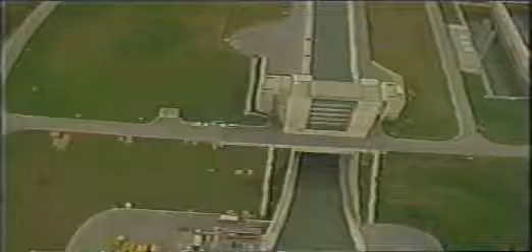Infrastructure is the domain of the civil engineer. It is civil engineers who design, build, and maintain the public works which constitute the physical framework of the civilization we enjoy and often take for granted. In the course of the 20th century, we have seen achievements in this field that our ancestors never could have imagined.

As the momentum of our technical success carries us forward into the 21st century, it is time to review where we have come from, what we have learned, and where we are going.

The Alps loom like snow-capped giants, barring the way to travelers between the Italian peninsula and the world to the north. These mountains and the roof of Europe are typical of the challenges which civil engineering was created to overcome. The world's first modern mountain tunnel came into being at Mont Cenis, born in the railway building frenzy that sprang from the Industrial Revolution. Dynamite and rock drills used in the Alps in the 19th century launched a new era in the art of tunnel making.

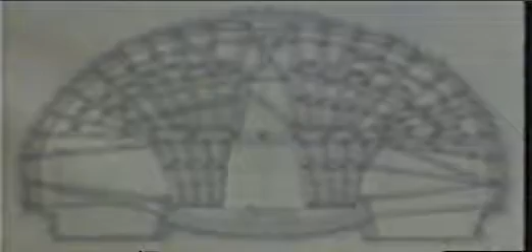Today, the St. Gotthard, the world's longest highway tunnel, runs 16 kilometers through the Swiss Alps. The evolution of tunnel technology from the 19th century to the present has not been easy. In mid-20th century Japan, the Tanna Tunnel and others were built by what was at the time the most up-to-date technology. But the operation was still labor-intensive, plagued by floods and the ever-present danger of collapse. Elaborate scaffolds were devised to keep the ground in place, but structures of wood and steel can only provide support at certain points, and the trouble may begin at any point.

Rock is typically fragmented, and the cracks are often filled with sand and clay. Under the influence of gravity and seepage, these work loose. A piece of rock falls out, and then another. Disintegration is underway. In 1940, an Austrian tunnel engineer, Ladislaus Rabcewicz, became known for a new idea. The principle of the New Austrian Tunneling Method, or NATM, was to transform the fractured surface of the tunnel into a continuous self-supporting arch.

Wet concrete is sprayed over every inch of the walls and ceiling of the tunnel. The concrete lining prevents the escape of the bits and pieces, which, if they're kept together, give the arch its natural strength. The concrete fingers of the lining reach into cavities, uniting rock and concrete in a single purpose. Successful technologies spread rapidly in a shrinking world, and widespread use improves them.

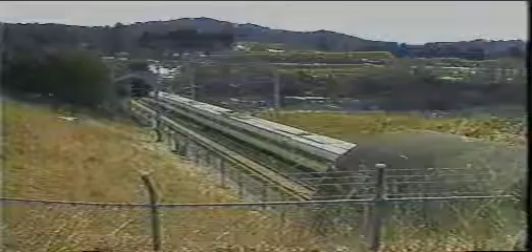Japan is largely mountainous. Tunnels are links in its communications infrastructure. The Austrian method was effective for long, large tunnels needed for bullet trains and highways. Timing was crucial to the method's success. After the initial excavation, the concrete lining had to be applied to the raw surface as quickly as possible, leaving no time for rock to start deteriorating. The stability of the lining is enhanced by using iron rods called rock bolts. The rock is drilled to receive them.

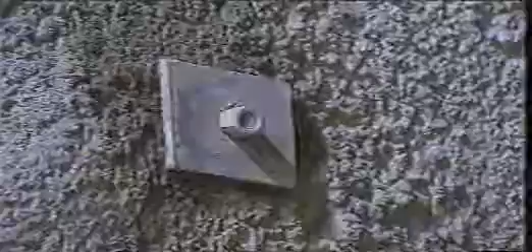Bolts are cemented deep within the rock and serve as anchors. The rods and plates keep the concrete sheath secure and the tunnel intact. NATM was a technical revolution. Kanmon Strait divides the island of Kyushu from Honshu, Japan's main island. Linking these islands was the job of the world's first undersea tunnel, completed in 1944. Lessons learned here let Japan undertake the daunting task of a tunnel linking Honshu with the northern island Hokkaido. The trigger was the loss of a ferry boat with over 1,000 lives in 1954.

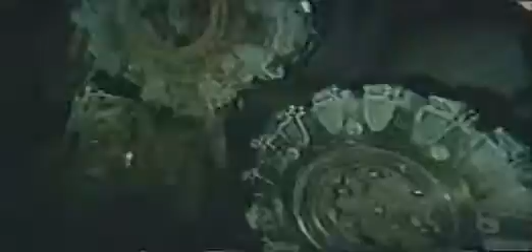Construction of the Seikan Tunnel began in 1971. Surmounting many difficulties, including earth faults, the Seikan Tunnel was finished in 1988. Honshu and Hokkaido were joined by the longest tunnel in the world. Technology developed for the Kanmon and Seikan tunnels played a major role in building another tunnel, half a world away, the Eurotunnel under the English Channel.

This is the breakthrough, the final moment. Until this moment, Britain, the island, was odd man out in Europe. Now, symbolically at least, that special status has come to an end, thanks in part to this remarkable machine. The Eurotunnel now links Britain to the continent of Europe. Over 15 million people currently take ferries or hovercraft each year.

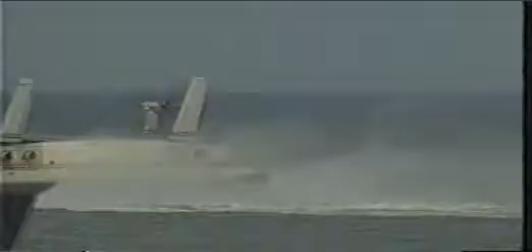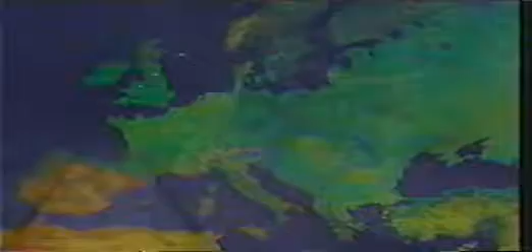The Chunnel, as it's called, was born of the conjunction of political imagination and modern engineering. It's certain to become a major link in the infrastructure of a new united Europe. June 1993 saw the first test run of a train from France to England. Eventually, London and Paris will be just 3 hours apart. The tunnel runs below the ocean floor of the English Channel for 38 kilometers, though its overall length is nearer 50.

It's strictly for railways, and when it's in full service, will run 10 trains every hour. The car trains will carry trucks of up to 40 tons. The construction of the Eurotunnel took a mere 3 years. This was in part due to favorable ground conditions and in part to technology.

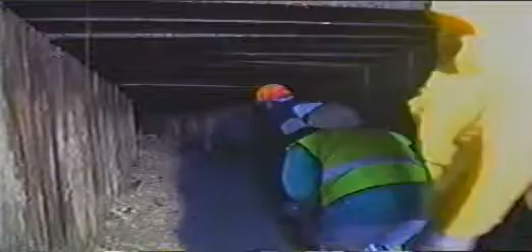The dream of a tunnel under the English Channel has been around for at least a couple of hundred years. In 1876, Queen Victoria and Napoleon III agreed to make it happen. Drilling was done on both sides of the channel. One can still see the remains of this short-lived enterprise near Folkestone.

Techniques used then for drilling through chalk were primitive precursors of those we use today. The machines themselves were steam-powered prototypes of the ones used in the 1990s to excavate the channel. Politics halted this project after a brief 2 kilometers, and the dream lay dormant for another 100 years.

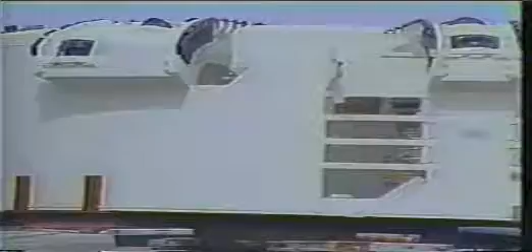In the modern world of the 1980s, 9-meter diameter Japanese machines played a part in unifying Europe. 11 of these tunneling machines were used to dig the Eurotunnel. France and Britain mobilized their engineering power. Vertical pits were dug on both sides of the channel. From the bottom of the pits, tunnel machines began to dig horizontally.

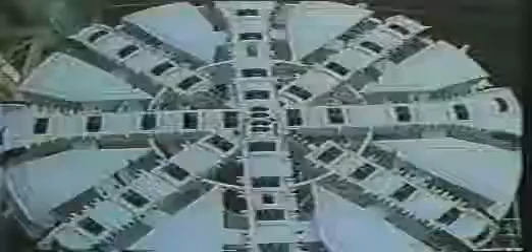The rotating cutter is at the front end of a cylinder of steel which encases and protects the whole machine. Behind the cutter, an apparatus assembles the concrete tunnel lining while excavation proceeds. When a ring of concrete is complete, a series of hydraulic jacks push against its rim, and the whole machine advances.

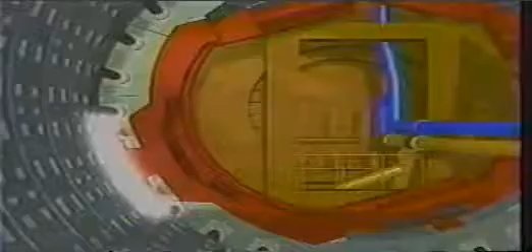It's called a shield machine. It builds as it drills and trails the finished lining and its own support surfaces behind it. This is the shield construction method at its best.

The main problem encountered by engineers building undersea tunnels is water seepage. In the case of the channel, the geology was benign. A stratum of blue chalk running 40 meters below the channel floor resists water penetration. But the layer is only 20 to 30 meters thick, so careful subterranean navigation was essential. The shield machine is not suited for drilling in complex or unstable strata, but it is ideal for blue chalk.

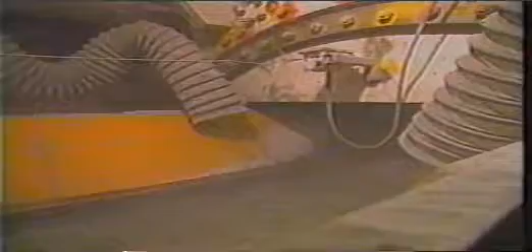Sometimes the machine dug 50 meters a day, 3 times faster than expected. On an average day, 20,000 tons of material were pulverized and carried to the surface, enough to fill 2,000 dump trucks. The construction of the lining, of course, had to keep up with the pace of the excavation. The 8-ton concrete segments of the cylindrical wall were automatically applied to the wall of the tunnel.

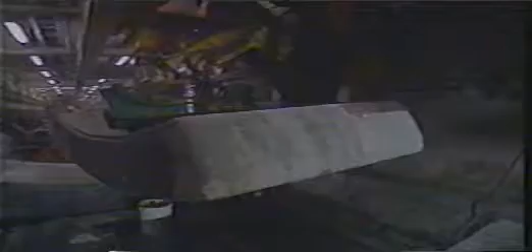The tunnel is almost 8 meters across. Together, the blue chalk layer and the latest shield construction technology let the tunnel under the English Channel be built in record time, 50 kilometers in 42 months.

The shield method idea was devised in Britain in 1818 at the peak of the Industrial Revolution. The first tunnel built with this method goes under the River Thames. The inventor was a creative engineer called Marc Brunel. That first tunnel is still part of the infrastructure of the London Underground. Wapping Station still uses the vertical shaft from the bottom of which Brunel's machine bored below the river.

At the time, many people thought that the ground below the river was too unstable to permit construction of a tunnel, but Brunel, with his invention, proved them wrong. His tunnel has survived for more than 150 years. Marc Brunel owned a lumber mill. It was there that he found the clue which led him to invent the shield machine.

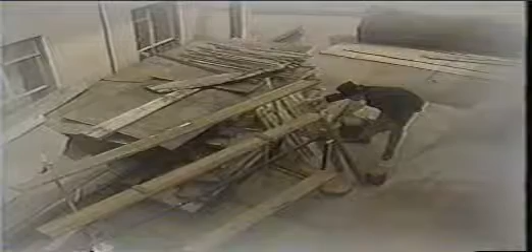Brunel was intrigued by the little holes which are often seen in old lumber. The holes are made by shipworms. They're mollusks related to clams. At that time, London docks were full of ships from all over the world, and their hulls were full of worms. These creatures, just millimeters thick, may grow to be tens of centimeters long.

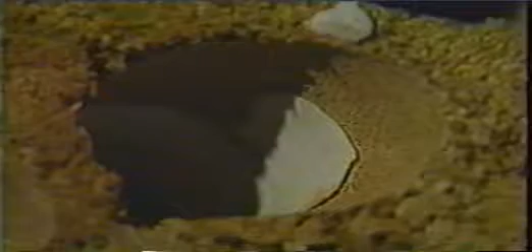They bore into wood using their tiny shells to do the drilling. As they progress, they secrete a substance which coats and toughens tunnel walls against compression and collapse. The white substance here is a shipworm's tunnel lining. The notion of boring and building simultaneously inspired Brunel.

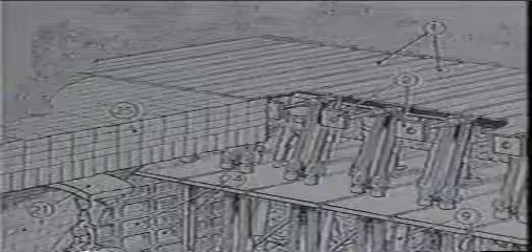The walls of the tunnel he conceived were not concrete, but brick, and construction was primitive by modern standards, but this is how it began. Marc Brunel was born in France, but came to live and work in England. His homelands have now been linked by his invention, inspired by a clam, the shield construction method.

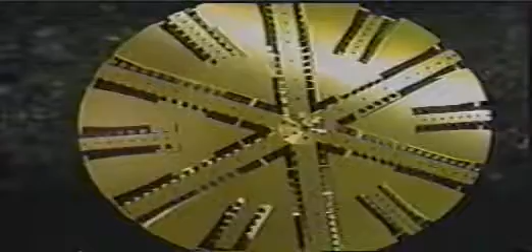The largest and most advanced shield machines are now being manufactured in Japan. This one is 14 meters in diameter and will weigh 3,000 tons. Meanwhile, a tiny sensor controls its automated functions, its nervous system. These sensors will be its eyes and fingers for watching and feeling.

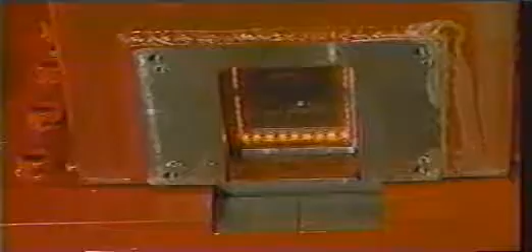The activities of the giant automatic wall constructor are directed in accordance with information delivered by laser sensors. They guide the assembly to a tolerance of less than 1 millimeter. Sensors will be stationed at over 100 points on the machine.

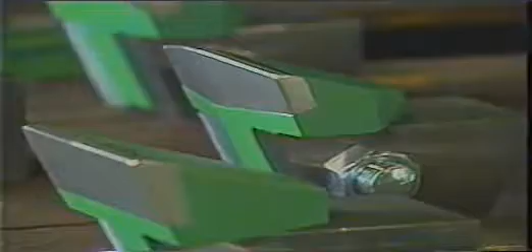The cutting blades, teeth, determine the speed of excavation. Most of the soil in Japan is a complex variety of strata, and cutters have to cope with that variety. Blades are made of exceptionally durable materials like tungsten carbide and cobalt steel. Shield machines are now being used extensively in Japanese cities for subways and sewage systems.

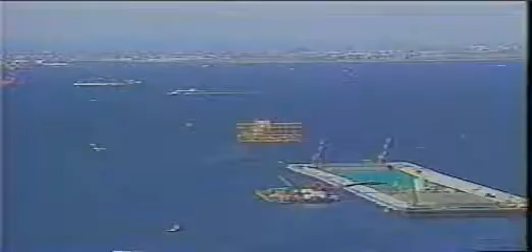Tokyo Bay is today a showcase for the most up-to-date developments in infrastructure technology. A 15-kilometer overpass is being built between Kawasaki and Kisarazu. A 5-kilometer bridge will link the Kisarazu side to Kisarazu Artificial Island. From there, the road will pass for 10 kilometers through a tunnel under the ocean to Kawasaki. Halfway along the tunnel is a second artificial island.

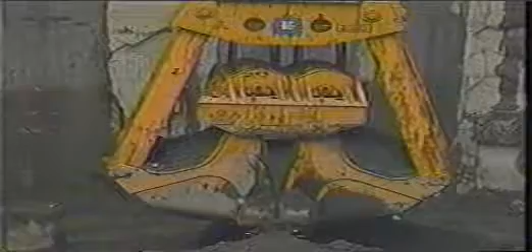At that point, a vertical hole 100 meters in diameter will ventilate the tunnel, exhausting the fumes of the 64,000 vehicles which will pass through daily. This huge hole will serve initially as a base for shield machines used to build the tunnel. The giant excavators are already dwarfed by the structure they are helping to create.

From the bottom of the pit in Kawasaki Island, shield machines will drill in both directions until they meet their opposite numbers beneath the ocean floor. 8 machines will be employed. They are 14 meters in diameter. Each of the tunnels will carry a 2-lane highway.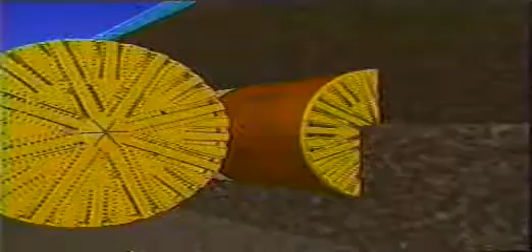Digging underground is not the only way to make a tunnel. Some are manufactured on the surface. These bleak concrete structures that look like a series of crude warehouses are in fact components in another kind of tunnel for Tokyo Bay development. Each unit is 130 meters long by 40 meters wide. Each is a section of concrete duct sealed temporarily at either end by steel plates. Strung together end to end on the seabed, they'll carry a 6-lane highway between 2 artificial islands.

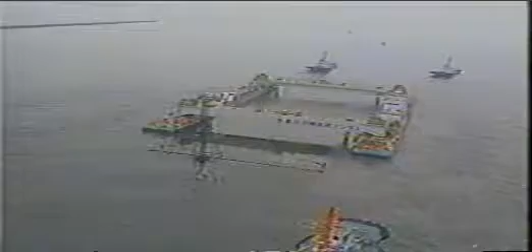4 are in place already. The 5th is on its way. The caisson is suspended from a pontoon frame just below the surface of the water. The whole system is towed to the site by tugboats. Like the shield machine, this method was invented in the 19th century. The first tunnel of this kind constructed in Japan was built in 1944.

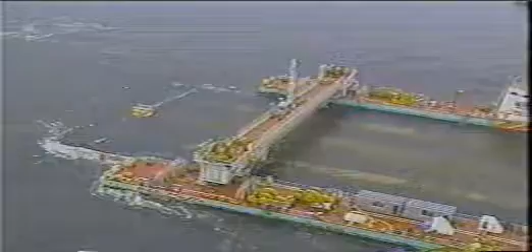This method is only suitable in comparatively shallow water. The box tunnel under construction will consist of 9 concrete sections with a total length of 1,200 meters. It will become part of the Metropolitan Expressway. The crew is now lowering tunnel section number 5 into the grooves prepared for it on the seabed. It will connect with the already submerged section number 4, where another crew waits to receive it.

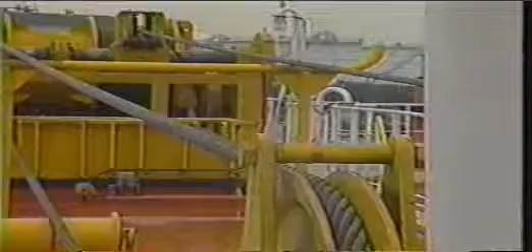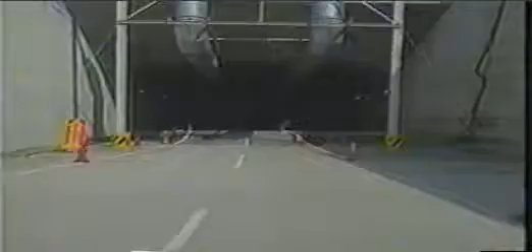Engineers at the surface use sonar to monitor the precise placement of the caisson. Shifting ocean currents could be disruptive. We are now driving down the part of the tunnel which has already been assembled. The receiving crew is at the end, waiting to tie section number 5 into the system. In the center of the picture we see one set of the hydraulic rams which will draw the new section into its final position.

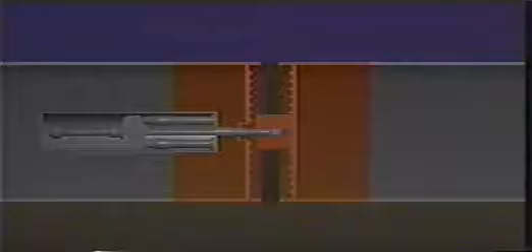This is a graphic preview of the docking procedure. After the units are in place and sealed together tightly by the pressure of water against them, the water between the temporary bulkheads will be drained out. The hydraulic rams are now drawing Section 5 into position. The capacity of the rams is 400 tons, but the caisson weighs 50,000 tons. Docking had to be done making precise allowance for the current and the seafloor profile.

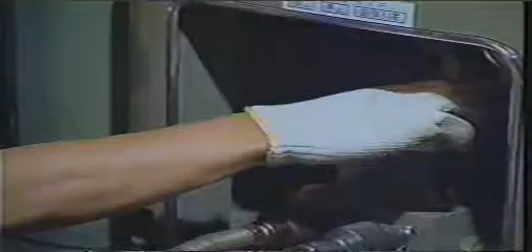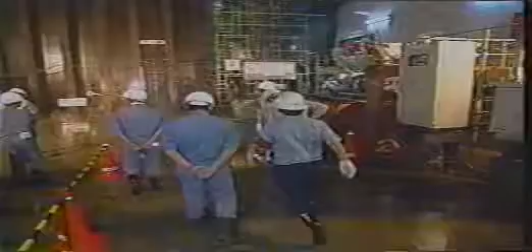Section 5 is now in place. Valves are open to allow the water to drain from between the bulkheads. The lowering of the new section from the surface began 10 hours ago. The tunnel is now 130 meters longer.

The British economy boomed in the 19th century, putting pressure on her transportation system to expand. In the race for prosperity, bridge and railroad construction engineers overcame obstacle after obstacle. But the efficient extension of the British rail system into Scotland was interrupted by two formidable barriers, the Firth of Forth and the Firth of Tay. These great arms of the North Sea stood in the way of economic growth.

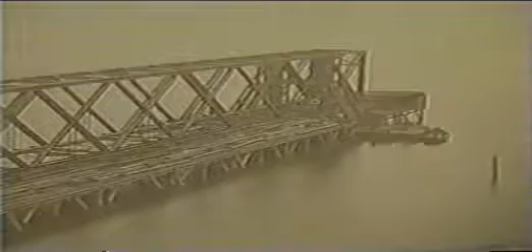Britain's daring response was to build a bridge over the Firth of Tay. The bridge over the Tay was the crowning achievement of the Age of Iron, 3 kilometers long. In 1878, it was the world's longest bridge. It took 7 years to bridge the Tay.

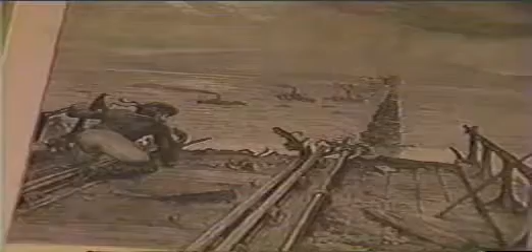Then one night, less than 2 years after it was finished, a storm slapped it down. A train plunged off the broken end. 75 lives were lost, the worst accident in railroad history to that time. Local historian Christopher Dingwald. Well, here we are at the Tay Bridge.

And what you see is the remains of Thomas Bouch's old bridge alongside the new bridge. All that you see of Thomas Bouch's bridge are the bases of the old piers or pillars which supported the bridge, which just stick up above the water. These were the foundations on which engineer Sir Thomas Bouch raised his cast iron piers, a popular building material at the time. However, the official inquiry blamed the disaster on the weakness of those piers.

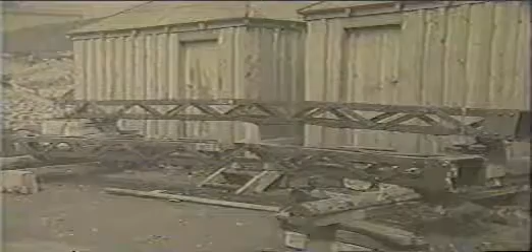Suspicion focused thereafter on cast iron as a material for construction. But what was the alternative? Henry Bessemer had recently devised an economic method for mass-producing steel. The British government was hesitant at first, but after many tests, it endorsed steel as a material for construction.

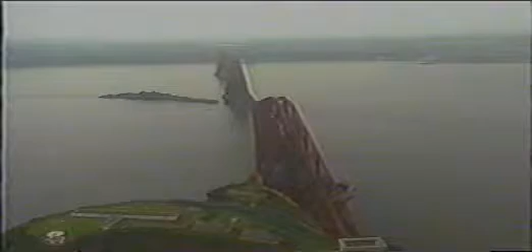The bridge over the Firth of Forth was built 11 years after the Tay Bridge disaster. This bridge now became the largest in the world, built entirely of steel, 51,000 tons of it. Some critics of the day complained that the bridge across the Forth was over-designed, but the Tay Bridge collapse was still fresh in people's minds. The bridge over the Firth of Forth celebrates the advent of the Age of Steel.

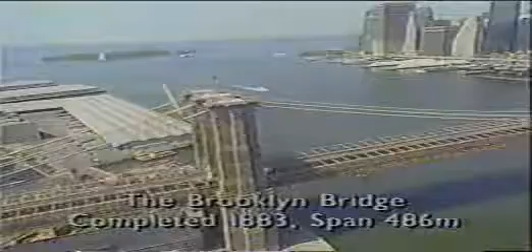The Brooklyn Bridge spans New York's East River. Built in 1883, it is a landmark of suspension bridge technology. Continuous improvement of suspension bridge technology since then has resulted in a series of bridges spanning greater distances, advancing from 500 to 1,000 meter spans in 50 years. The Seto Ohashi Bridge, Japan. In Japan, a land of islands, the evolution of suspension bridge technology has been exceptionally rapid.

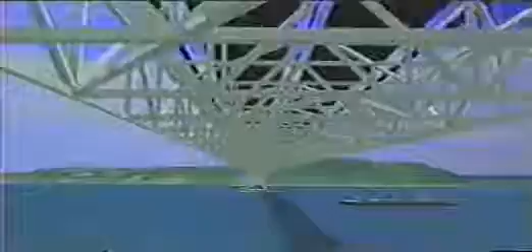The crowning achievement of that technology is being built over Akashi Strait from Kobe to Awajishima Island, almost 2 kilometers long, 500 meters longer than the current world record. Its cables must support 120,000 tons. The girder can stand winds of better than 320 kilometers an hour. This is one of the 2 towers. Each tower is built up of 30 hollow steel blocks piled one above the other.

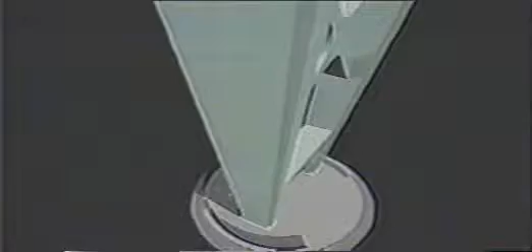The finished tower must be vertical. Precision is essential. The blocks must fit perfectly. No bumps or gaps, however small, will be permitted. The steel blocks were manufactured in 13 factories throughout Japan. These blocks have just been built. End faces are still uneven. Now begins the all-important work of milling them smooth.

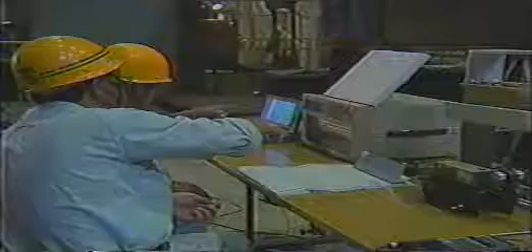The work is done at night, when distortion of the block due to temperature variations at different points is minimal. Work will begin when the 8 sensors read within 1 degree Celsius of each other. Work began tonight at 10 p.m. Using this rotary cutter, the worker shaves the surface absolutely flat. Each block is processed by a single person to ensure consistency. The job requires a high degree of skill as well as the right machinery. The aim is to finish before morning, when temperature variations could result in slight but critical distortions.

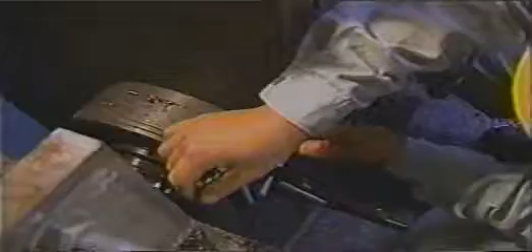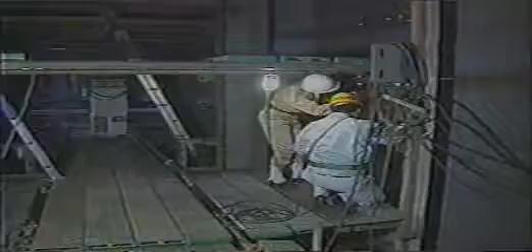The milling is finished. It's time to put two blocks together to see how well they fit. These blocks are carefully aligned, lying on their sides. A feeler gauge tests for gaps. The metal strips are 1/100th of a millimeter thick. There are 500 test points where the two blocks meet. If the feeler gauge can be slipped in at more than half of these, the fit is unacceptable.

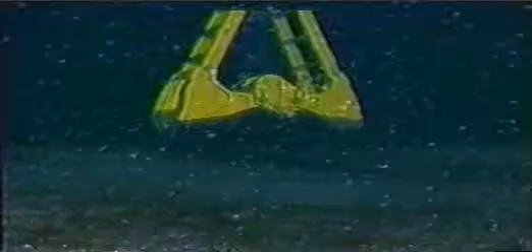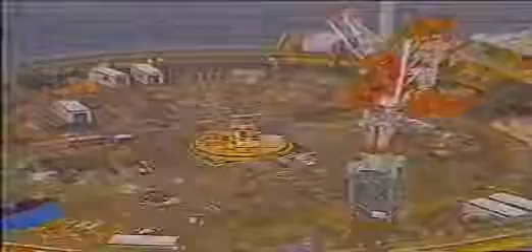Precision in its foundations is just as important as precision in the towers. Fast currents made the world's heaviest seabed excavator, 200 tons, essential. A submarine robot is used to check the flatness of the seabed. Caissons 80 meters in diameter will form the tower foundations. Extraordinary precision is demanded of the surface on which the towers will stand. The surface was polished for 3 months to bring it to a mirror finish in preparation for the assembly of the towers.

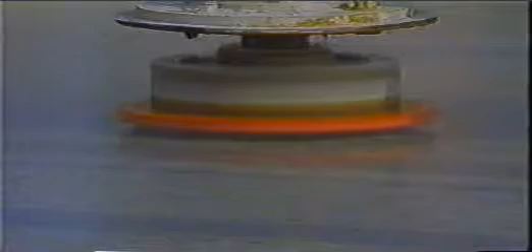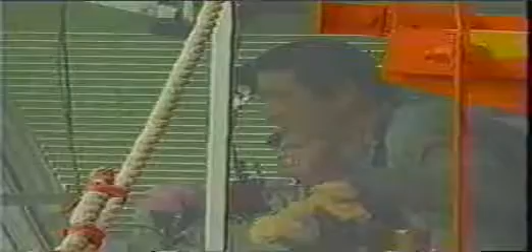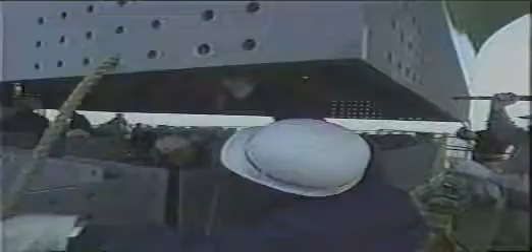Construction of the towers is now well underway. Each block weighs close to the 160-ton capacity of the crane. 280 meters above sea level, the wind is a constant hazard. Its speed and direction must be closely watched. The crew at the top of the tower help guide the block into its position. At this point, human judgment and human skill are indispensable. The moment of truth. Will the perfect fit be realized? It must be under 5 millimeters. These guide marks must line up.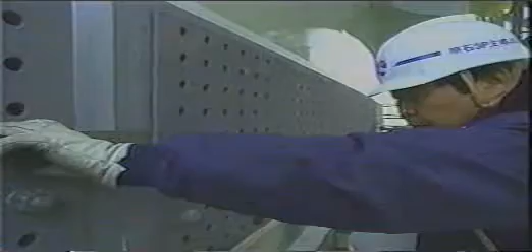The block is finally in place. 10,000 bolts will follow. The error, less than 1 millimeter. The feeler gauge confirms success. Now the twin towers wait in the Akashi Strait for the 120,000-ton bridge to be completed in 1998.

July 1940, the opening of the Tacoma Narrows Bridge. This bridge across Puget Sound was built more than half a century before the towers in the Akashi Strait. Engineers learned from past mistakes, and the disaster of the Tacoma Bridge provided a terrifying lesson.

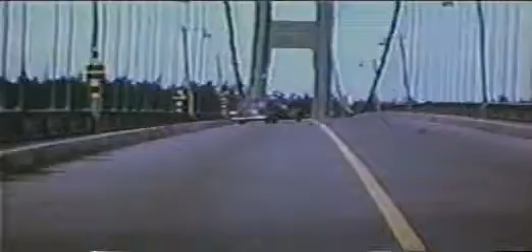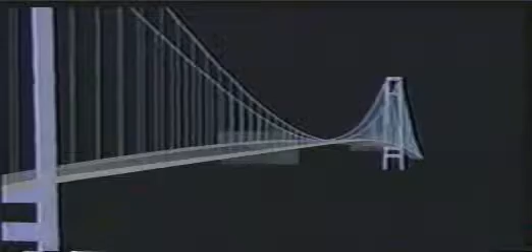4 months after it opened, the so-called ribbon over the Sound was blown apart by a wind of only 68 kilometers per hour. Why did it happen? Aerodynamic specialists in civil engineering eventually found the answer.

A succession of low-pressure eddies roll across the bridge above and below, but the eddies above are out of step with the eddies below. A rolling pull above is followed by a rolling pull below, resulting in a twist. The twisting is rhythmic, and the rhythm is self-reinforcing. Orange areas represent the force exerted at different points and at different times as the wind streams across the surface.

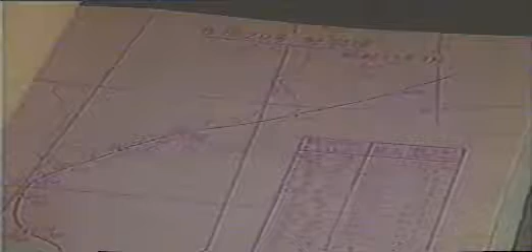Before they designed the Akashi Bridge, the Honshu Shikoku Bridge Company made a careful study of the winds in the Akashi Strait. The record shows that in 1964, when a typhoon cut across the Seto Inland Sea close to Akashi Strait, it generated winds up to 183 kilometers an hour. It was agreed to design the Akashi Bridge to withstand winds of 281 kilometers an hour.

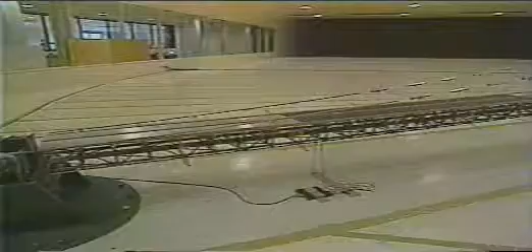The design was tested in the world's largest wind tunnel. A 40-meter-long model was used for the test. It copies the Akashi Bridge in every detail at 1/100th the size.

The focus of attention is the girder. After years of debate, the traditional truss type was chosen for the job. The truss girder has a long history of success and is resistant to twisting. Much of the wind will simply pass through its lattice. But how will it behave in winds of 281 kilometers an hour?

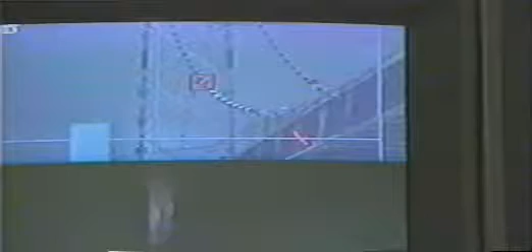36 powerful fans put the question to the bridge. The wind speed is gradually increased. It has now reached the 281 kilometer an hour maximum that the bridge is required to withstand. And there's not a trace of oscillation. The speed is increased to 335 kilometers an hour. Only here, at a speed beyond anything known in nature, do the fatal oscillations begin. The girder has passed the examination with flying colors.

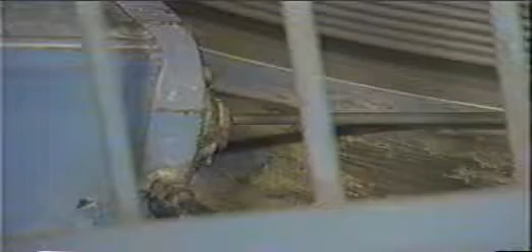The cable supporting the Akashi Bridge will be more than 1 meter in diameter. It begins life as a wire 11 millimeters thick, which is reduced in size still further by cold drawing. No heat is applied, just several tons of pressure. From 11 millimeters down to 5. Its tensile strength has been virtually doubled by squeezing out the gaps in the crystal structure of steel.

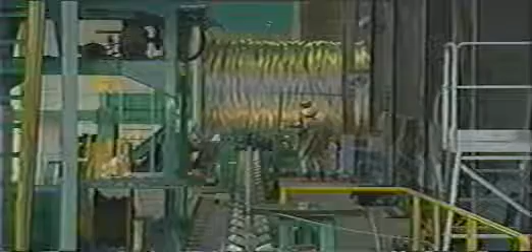Each 5-millimeter wire is more than 4 kilometers long. 127 are bundled together to make a strand. 290 strands will be strung over the channel one by one, and they in turn will be bundled to make the cable.

The construction of cable made from wires in parallel rather than twisted wire rope was first used in the Brooklyn Bridge, New York, in the 19th century. That invention spurred the evolution of suspension bridge technology. The culmination of that evolution is the bridge that will soar over the Akashi Strait.

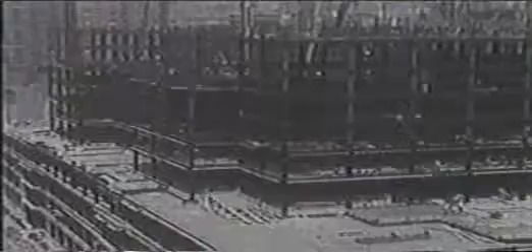Cities and their infrastructures grow in affluent times. The growth of New York in the early 20th century was phenomenal. Most of its skyscrapers, bridges, and highways were built before 1930. We take our physical surroundings so much for granted that the process of aging comes as a surprise.

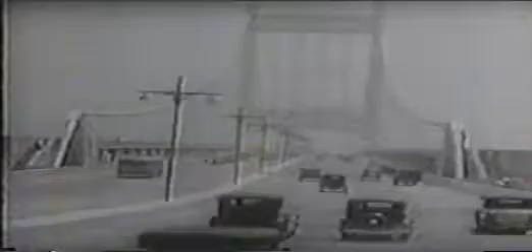In 1988, New York suddenly closed the Williamsburg Bridge. A crack more than 80 centimeters long was found in the girder. The cables were dangerously rusted. Part of a cable was actually broken.

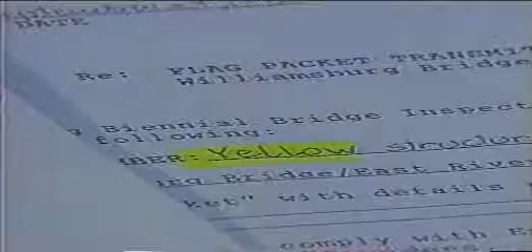The flag unit in the city of New York monitors the condition of the bridges on which the city's life depends. Red flags indicate areas in need of immediate repair. 2,000 of these have been identified. Yellow flags call for repairs in 2 years' time. Of these, there are more than 7,000.

Many of these are on the Williamsburg Bridge, indicating the large number of flags that we have on just one particular bridge. As the process of decay continues, red flags replace the yellow ones. The number of red flags has increased threefold in the past 4 years. Dr. Bojidar Yanev is with the Department of Bridges of the City of New York. And bridges over